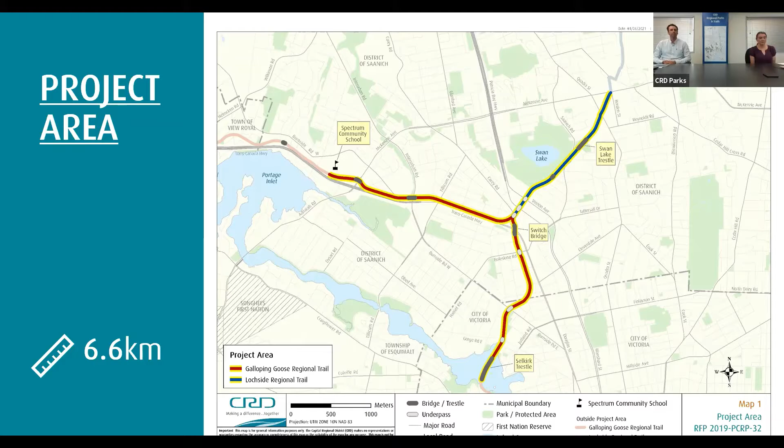So I'll now turn it over to Dan Casey from Urban Systems to provide detail on the study and the recommended separated use pathway with the lighting options. Excellent, thank you, and I appreciate that. So I'm going to spend a few minutes here walking through some of the key technical activities that were undertaken in producing the study, and then zero in on some of the critical takeaways and recommendations.

So the study was focused on opportunities to make improvements to this 6.6 kilometer section of regional trail. Some of the key opportunities that were being considered were providing more space to accommodate more people walking, rolling, and cycling, opportunities to improve safety at trail junctions and road crossings, opportunities to create comfortable conditions for travel on the trails at different speeds, as well as to improve safety, personal security, and comfort for users on the trails.

So with that in mind, a series of background technical activities were undertaken. One of the things that was done through the study was understand the volume of trail users using the trail today. If we maybe just advance back one slide, counts were undertaken in 2019 to establish a baseline for trail user volumes. The trail user volumes were separated generally into the three segments.

So the portion of the Galloping Goose between Selkirk Trestle and the Switch Bridge near Uptown was found to have approximately 2,700 trail users each day. The portion of the Galloping Goose to the west between Switch Bridge and west of the McKenzie Avenue interchange at about 1,500. And then about 2,000 daily trail users for the section of the Lochside Trail north of Switch Bridge to McKenzie Avenue. Worth also noting that the approximate breakdown of trail users is approximately 80% cyclists and about 20% people walking and rolling.

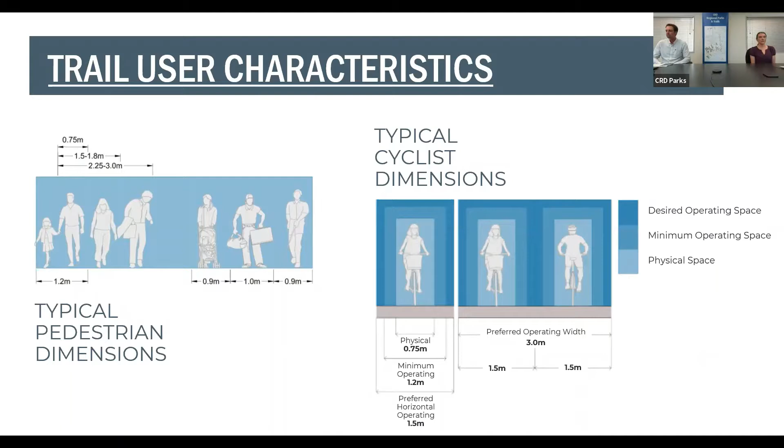Another key trail user characteristic is speed, and so understanding the difference in speed between the different trail user types. The diagram on the screen is showing typical walking speed of approximately 5 kilometers per hour, contrasted with the typical operating speed for a cyclist of 20 kilometers per hour and sometimes more when we're talking electric bicycles or more confident cyclists. So really having a handle on not only how many people are using these trails, but how quickly the different user groups are traveling.

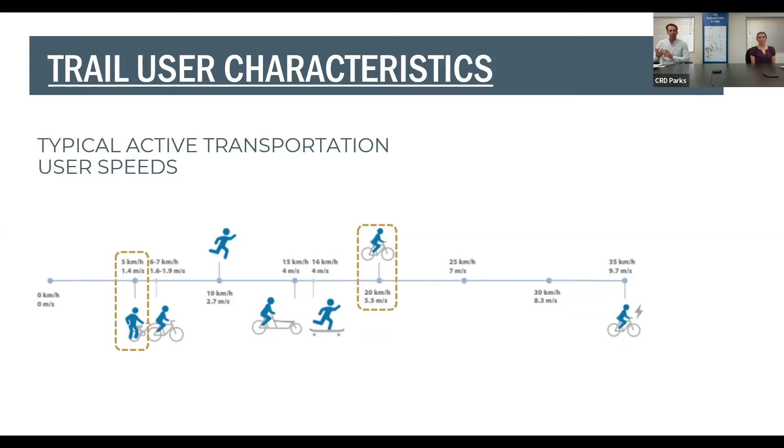Also developed through the study an extensive inventory of the baseline condition. Important to understand when we're considering what future improvements could be to what's in place today. So the map on the right-hand side of the screen is color-coded based on current trail width. The segments highlighted generally in red and orange are the more narrow segments currently in place. So between 3 and 4 meters, you start to see basically the entire stretch of the Lochside Trail within the study area, as well as significant portions of the Galloping Goose south of Switchbridge and Uptown.

We do start to see the areas in dark blue and lighter blue that are upwards of 4.5, 5 meters in width. We do see a fair bit of that western segment of the Galloping Goose, primarily related to improvements that have been made nearby McKenzie Avenue. Also important to consider some of the site-specific constraints along the corridor. So those being 6 different underpass locations, 5 different bridges or trestles, as well as a series of steep slopes, rock cuts, and retaining areas where potential widening is made more challenging with some of the physical constraints that are in place.

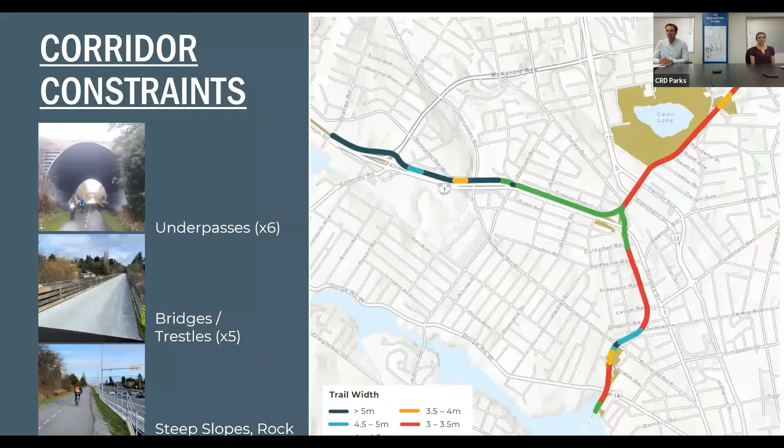So with that baseline technical information in place, as well as research into industry guidelines and best practices from other communities, a series of trail configuration options were developed. They're shown on the screen in front of us. Option 1 was a widening of the current trail facility, so retaining the mixed use function of the trail, but widening. Option 2 was to actually provide 2 separated operating spaces within the trail, so a separated use pathway. One portion would be dedicated to accommodating people on bikes, the other for people walking and rolling. And finally, option 3, which was again separated pathway facilities, but then with a center boulevard actually physically providing lateral or physical separation between the 2 facilities.

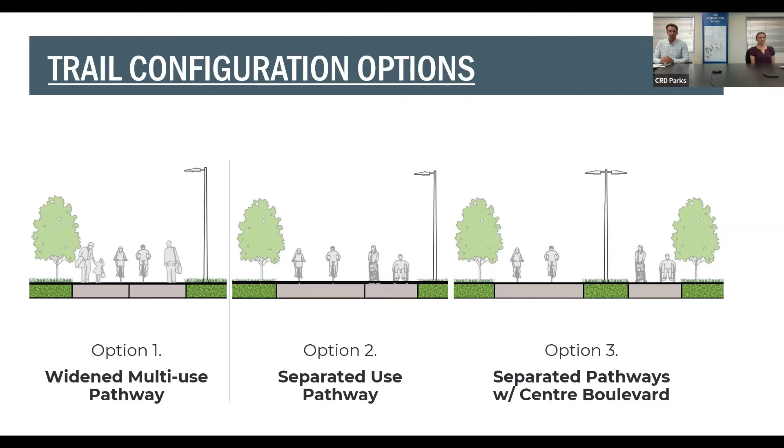So with those options in mind, an option evaluation exercise was undertaken, the goal of which was to understand and compare the benefits and disbenefits of each option relative to one another to help guide study recommendations around which configuration option to move forward. Some of the factors and criteria that were considered included capital costs, impacts or improvements on trail user comfort, trail user experience, improvements or addressing trail safety concerns and conflict between trail users, potential environmental impacts associated with each option, the overall quality of facility that could be achieved through each of those options, the constructability or the ease with which each could be achieved with the dimensions of the facilities that are being shown. And then finally, implications related to maintenance and ongoing operations that would be associated with each option.

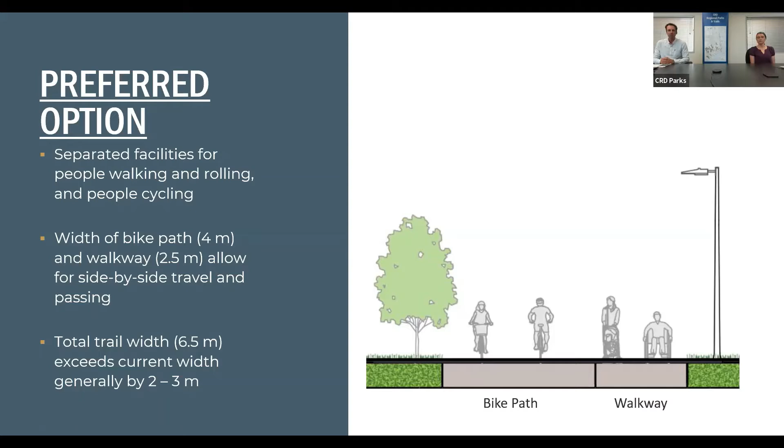So the study went through an options evaluation exercise using the criteria shown here, and led toward a conclusion and a recommendation that option 2, the separated pathway option, was the preferred option to move forward with. This includes separated facilities for people walking and rolling, separate from people cycling. It includes a bike path width of 4 meters and a separated walkway width of 2.5 meters, both allowing for side-by-side travel and passing within those facilities. And the result is a total trail width of 6.5 meters, which is generally an increase over the current width of between 2 and 3 meters, albeit with variation along the whole.

Consideration was given to phasing of improvements, so to identify which segments of trail improvement ought to be pursued first. The visual on the right side of the screen is identifying the recommended order of pursuing improvements or of priority. So in descending order, the highest priority was the southernmost section of the Galloping Goose, where we see some of the more narrow current trail widths, as well as the highest trail user volumes. Second priority was the portion of Galloping Goose through Switchbridge to the trail junction, and then extending north along the Lochside Trail to Saanich Municipal Hall.

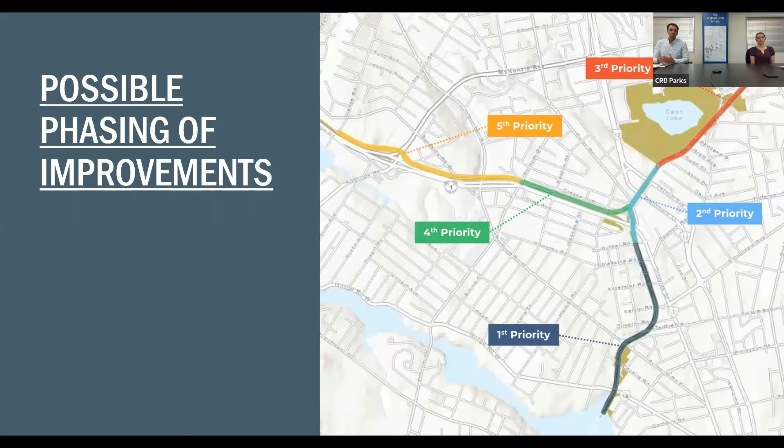Third priority, the segment of the Lochside Trail from Saanich Municipal Hall to the north, where we see some of the narrowest current trail dimensions. Fourth priority, the segments of Galloping Goose west of Uptown and the Switchbridge. And then finally, last priority, fifth priority, being the section west of Tillicum Road, where some improvements have been made recently as part of the McKenzie interchange project.

So the other key component to the study was consideration of trail lighting. And so the study considered various advantages and disadvantages associated with possible trail lighting. Some of the key advantages of lighting include an increase in user comfort and safety on the trails, the enhancement of the ability for trail users to navigate and wayfind throughout the trail system, the ability to better recognize and then avoid conflicts between trail users, enhancement to personal security and safety while using trails, as well as the likelihood of and the ability to deter deviant activities or behaviors within those trail corridors.

Important to also acknowledge some of the disadvantages and the challenges, cost being one. There's both the capital costs associated with installing lighting, as well as the ongoing costs associated with operating and maintaining lighting. There are concerns over lighting spillover into adjacent properties or activities and the impact more broadly on dark sky objectives. There are also concerns over impacts to the environment and natural habitats. And then finally, the potential for lamp standards at the trail edge to be a possible hazard or obstacle in the case a trail user would need to exit the trail.

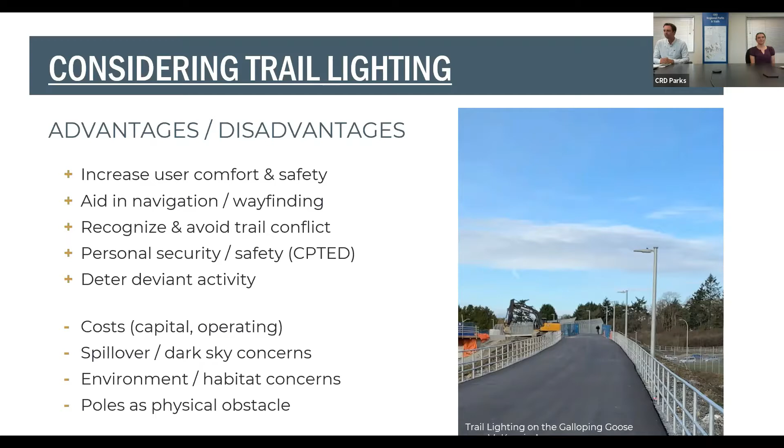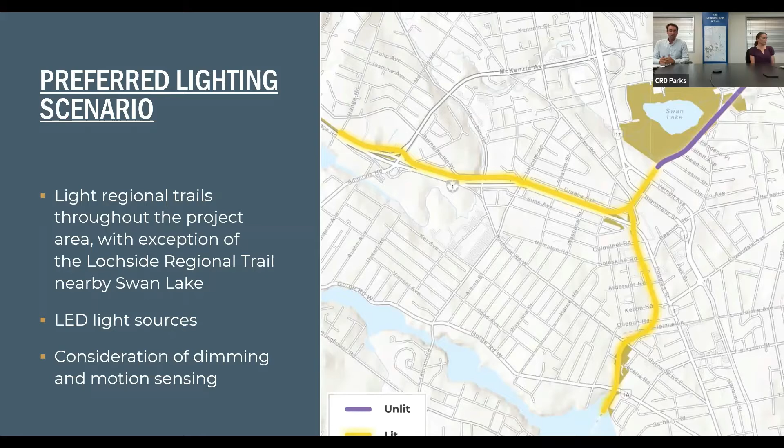So that sums up some of the key recommendations, key takeaways from the study, and I'm going to pass it back to Emma to talk about next steps. Thanks for that, Dan. Yeah, so I'm going to outline a few of the anticipated next steps prior to opening up the floor for some questions.

So we are in the public engagement phase of the project. So there is an online survey available right now on the CRD website. It's available until midnight, June 13th, for public to provide their feedback. So I do encourage you all to participate and take the survey. We'll be reviewing the feedback to determine the level of support for the separated use pathway design, for the lighting, and for the priority implementation sequence.

So we expect that a report will be presented to the CRD board this fall that includes the public feedback results and seeks direction for proceeding in some way or not with the project. So if the board does deem that there's support to proceed, funding would need to be secured through successful grant applications and an approved budget, and possibly partnerships with municipalities.